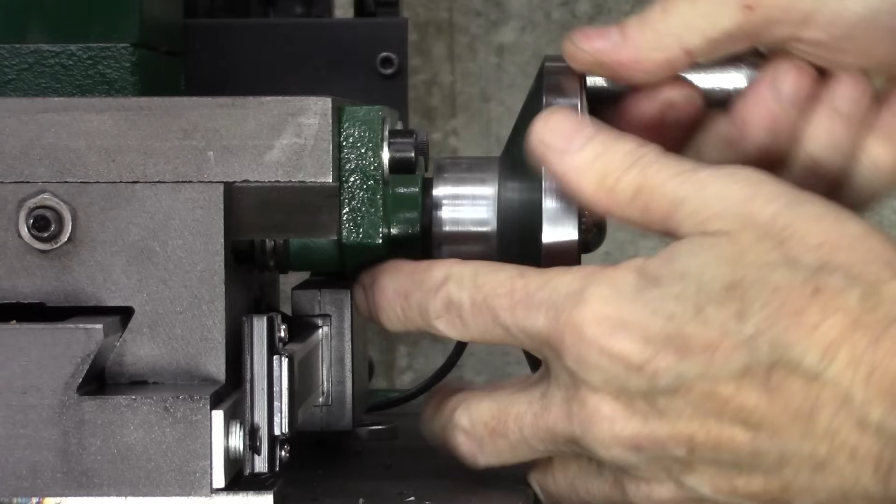What's stopping it is this thrust bearing right in here - you can see it right there, hitting the casting on this section. I don't like these lead screws anyway, they're 4 millimeters per turn. So we're going to replace this section with a different lead screw and let it pass right there. I think it'll work good.

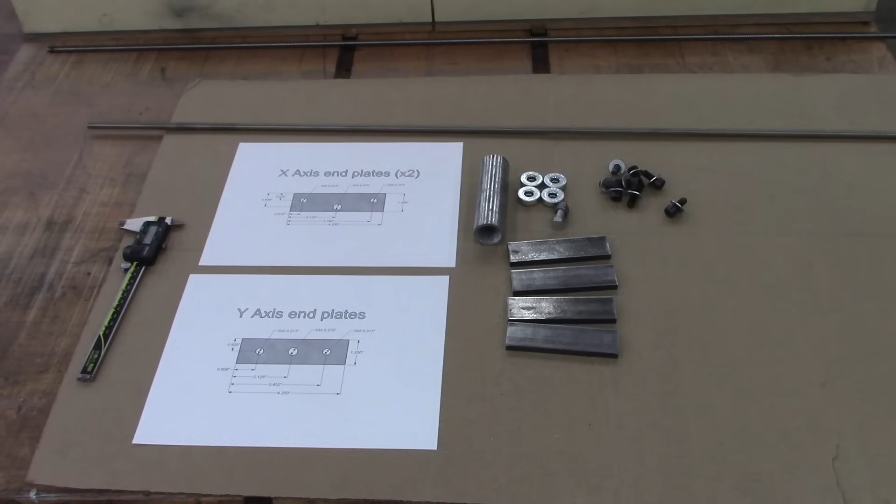Here's everything we need for this project. This is 1 and 1/4 inch stock - I think it's 5/16, but could be 1/4 or 3/8. It's a piece of 1-inch pipe, and I ground the galvanized off it because we're going to weld on that.

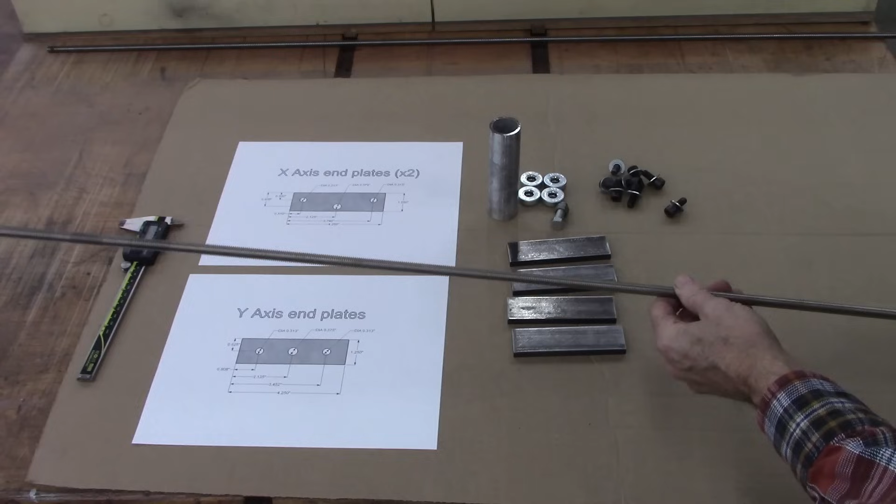I've got a piece of all thread here - stainless steel, and the reason it's stainless is because generally speaking stainless steel all thread is much better quality. That's going to be our lead screw, and these are thrust bearings - there's going to be one on each side.

Now that's going to slow down the travel of the table a lot. There are other options - this is a 3/8-10 Acme thread I got from McMaster-Carr, but the nuts that go with this are fairly high priced, and this is a little pricey too. I don't remember what I paid for it.

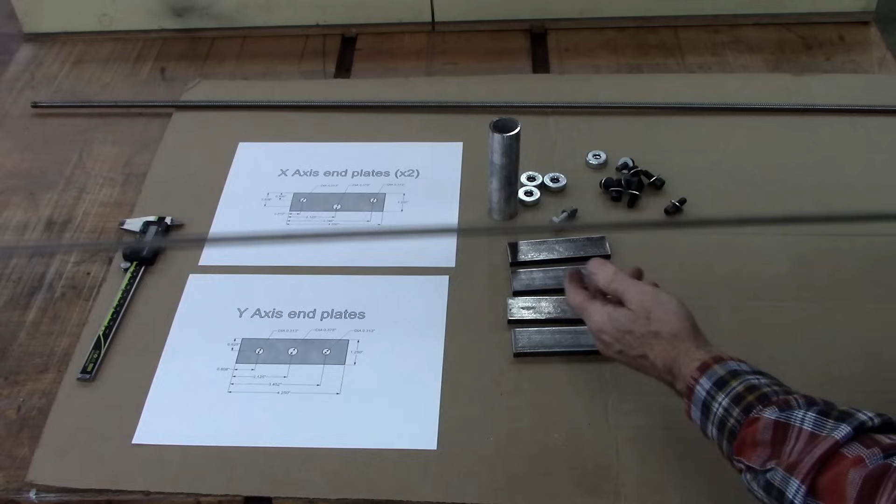But we're going to use this. One turn will be 1/16 of an inch, but I've got DROs on the table so it won't really matter. The 4 millimeter pitch currently on the table is a little aggravating because it's hard to hit the number on my DRO - it's very fast moving.

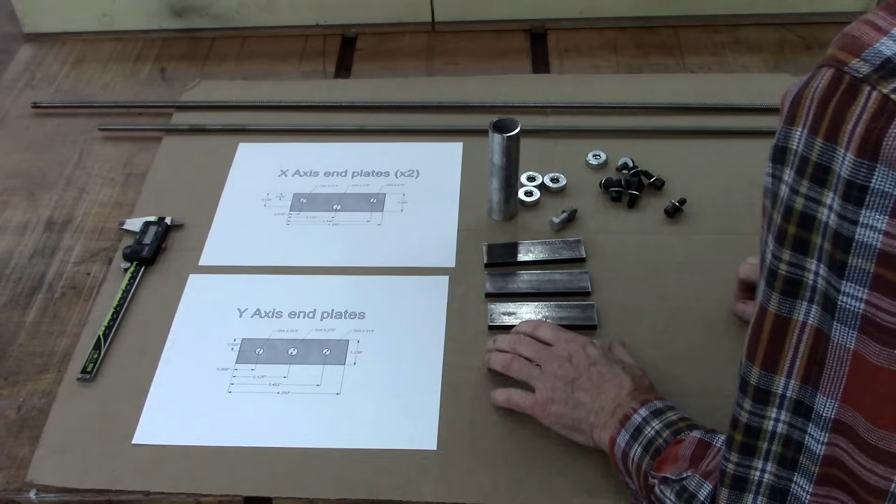So first thing we're going to do is make these plates - this one's for the Y-axis and this one's for the X-axis. We're going to use the XY table to drill these, and then take apart the XY table and install this.

Okay, I need to go in 5/10. 3.74.

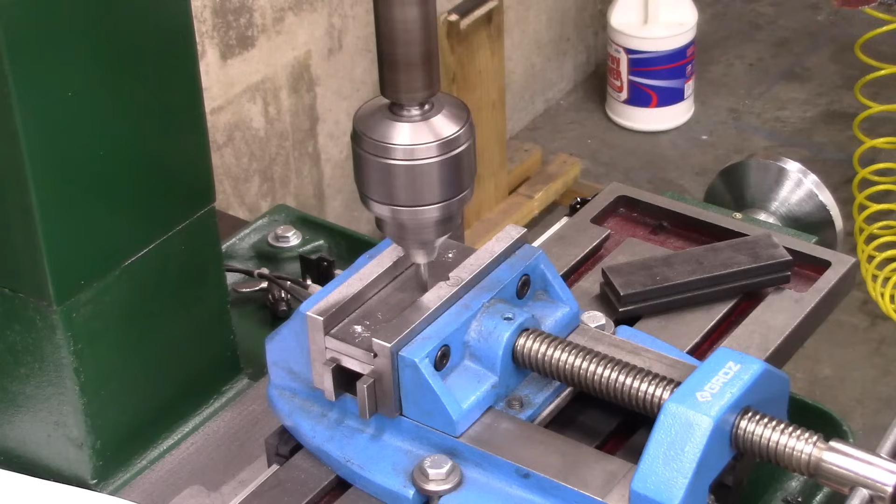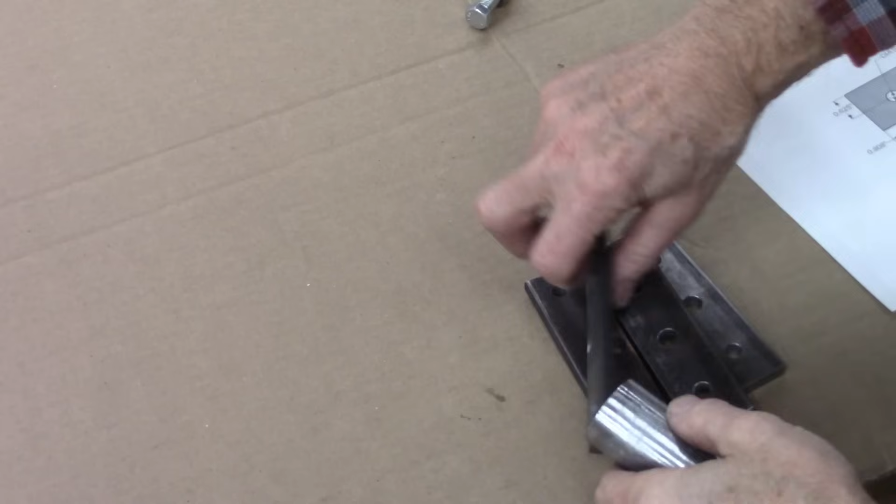Okay, the next thing we're going to do is cut little pieces of pipe off, just a little bit more shallow than that thrust bearing, and we're going to weld it there. That'll keep everything centered on this plate.

Okay, the inside diameter of this pipe is amazingly close to this thrust bearing, so we're just going to go inside. This is just regular water pipe - I'm going to open that up just a little bit.

If you don't have a lathe, you could probably do this by just cutting little rings off, but you'll have to take a die grinder or something to the inside of that.

Okay, I'm going to cut these off just a little bit shorter than these thrust bearings. We need four of these.

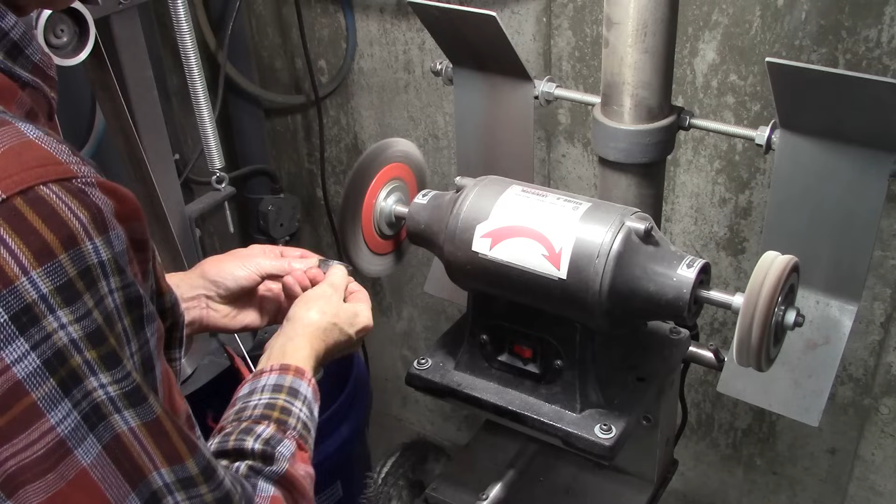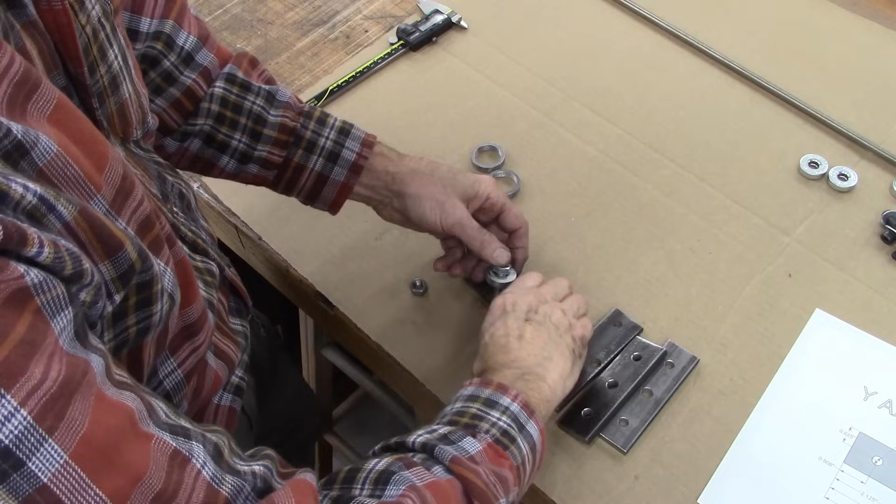Okay, my idea here is to bolt that on there, and weld that right there. I think it'll work good.

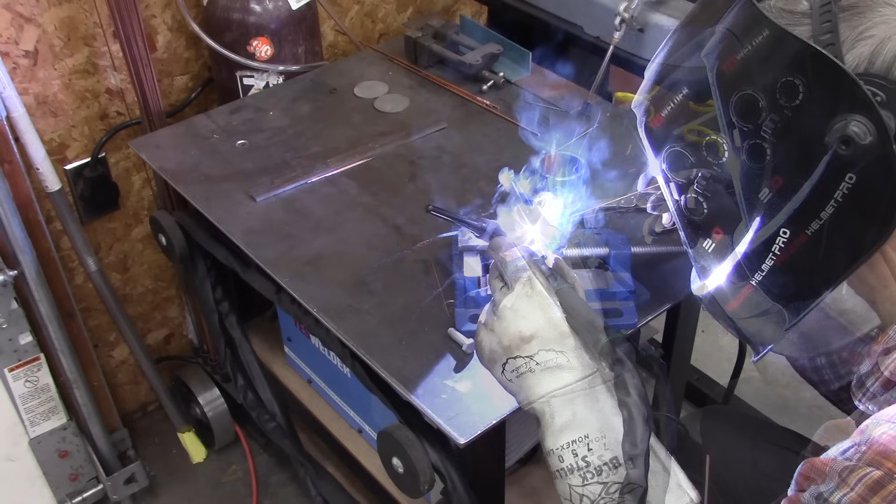Well, I thought I got most of the galvanized off of that, but there's still a lot of galvanized on there, and that's not good.

Okay, these thrust bearings are made in such a way that this side centers the shaft - in other words, this hole is smaller than this hole. So if you put it in this way, it's kind of a snug fit. I think those distorted a little bit, but they'll go in there. I just don't want to get them stuck in there yet - I want to paint these before I get them stuck.

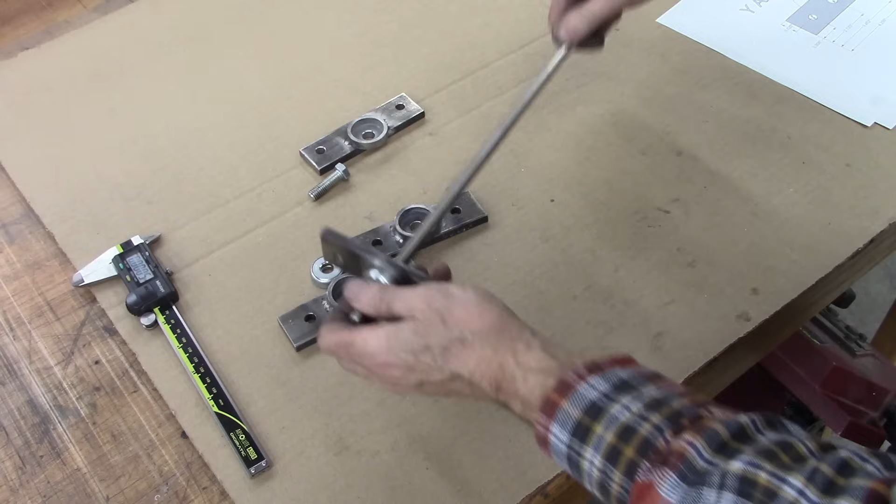The rod will go through there and we'll put a nut right there, and it'll be under tension, clearing the hole on the back side. So the threads are not a bearing surface. Okay, this is going to be bolted right there.

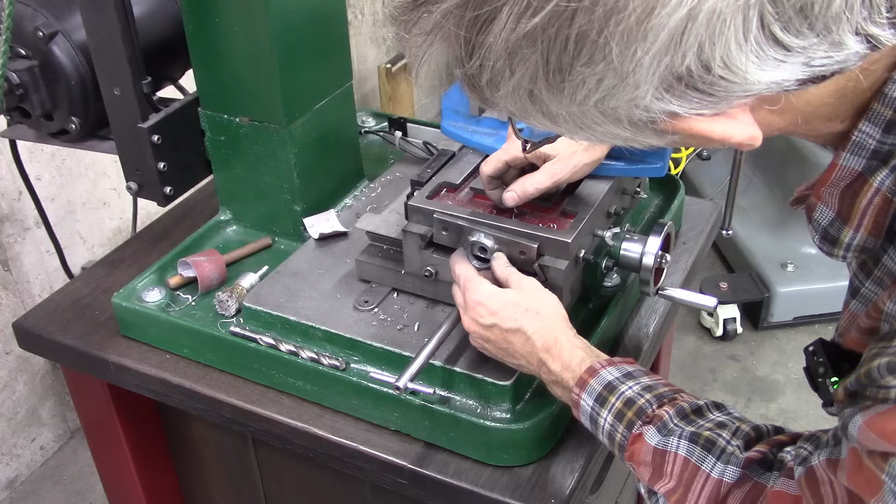But that's really close to hitting right here and here. I don't know if that's centered or not. Pretty close. But I'm going to grind that off right there on both of them. It could cut it off, but I'm going to grind it off.

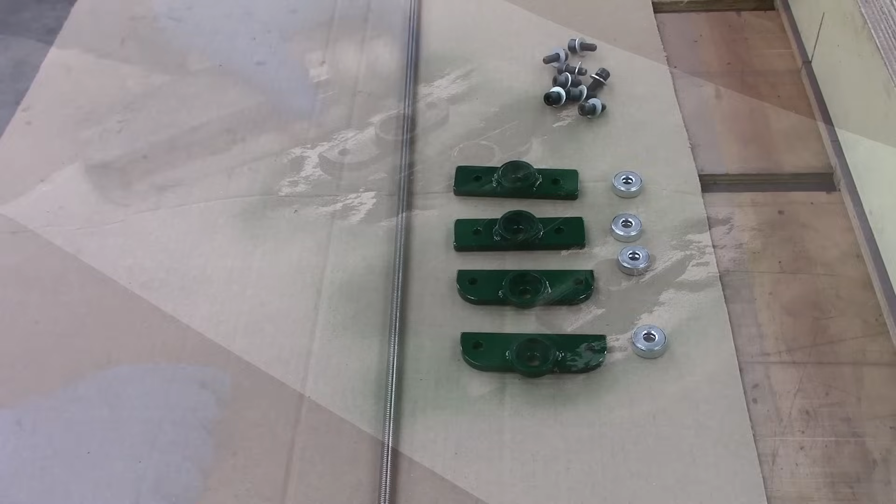Oh yeah, it gives me plenty of room. Okay, there's the bearing brackets for each end. I think it came out pretty good. I think it's going to work good. Now it's time to take this thing apart. Take the DROs off, take it off the drill press.

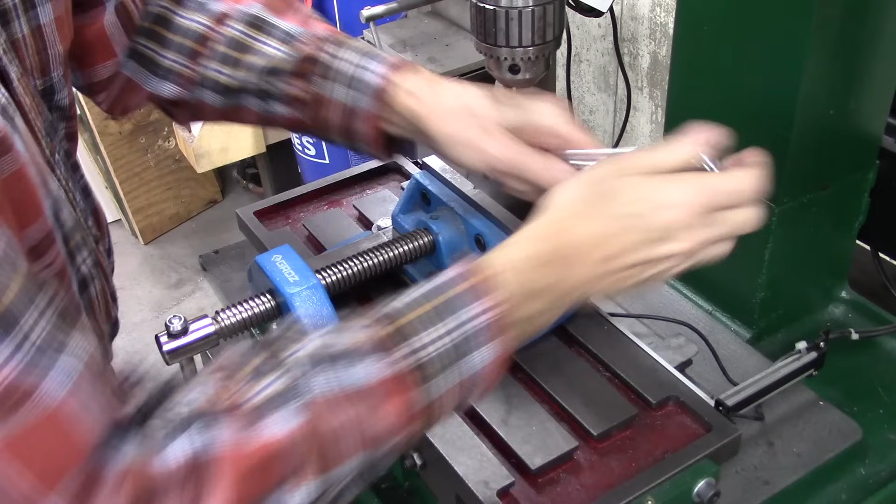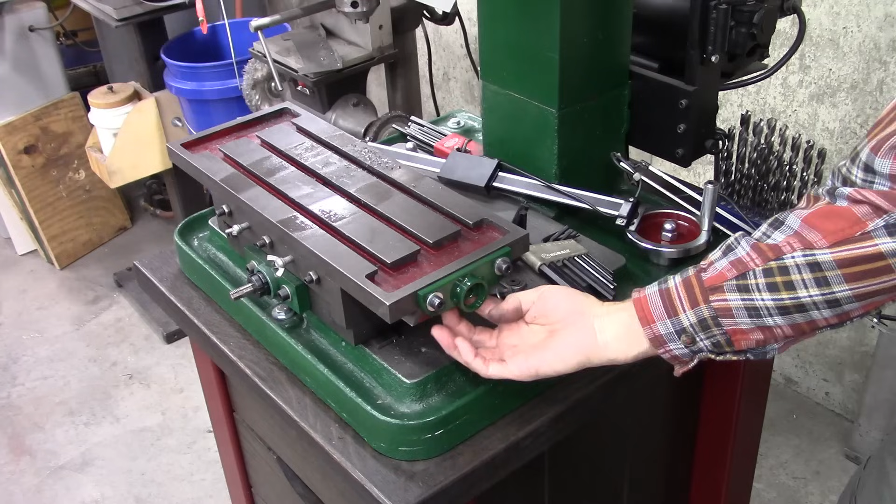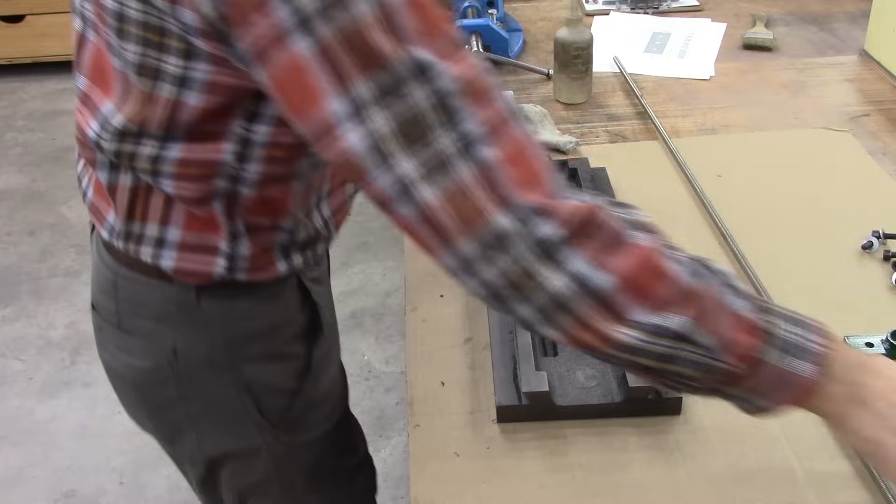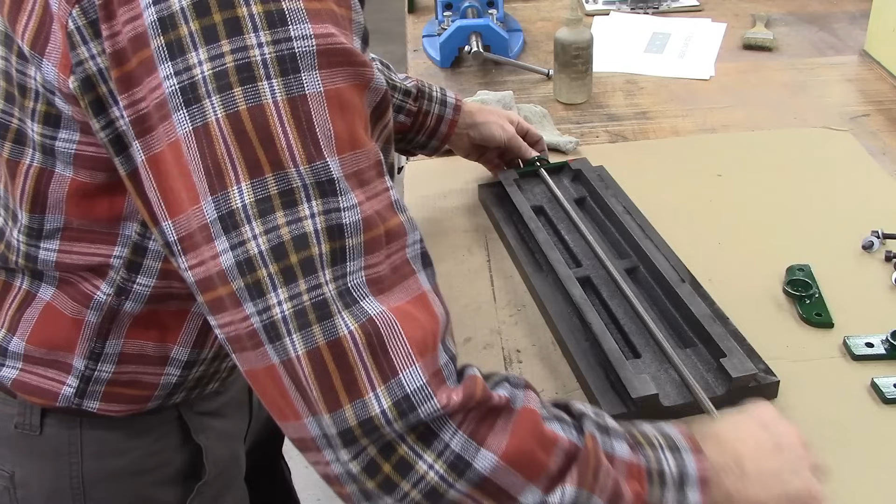Yeah, let's see if my brackets fit. I think that'll work. It's a little closer to the top of the table than I thought it would be. Yeah, let's take it apart and take a look at it. I may have to slot these holes to move that lead screw down a little bit. Really close to the table right there.

Okay, I drilled these brackets in pairs so I can mark it. I got this one bolted in on the original end of the slot where I drilled the holes, so I can measure over like this. Mark this one in the same spot and drill my holes. And then I'll continue with the tap size drill.

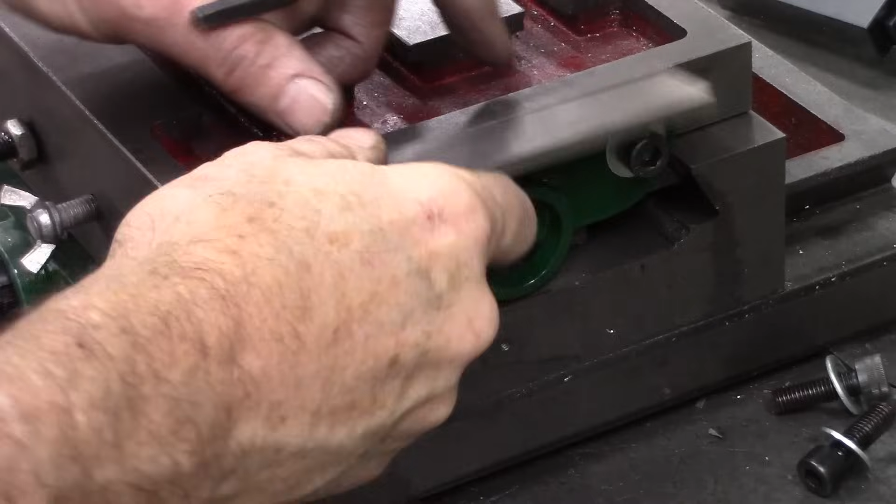Okay, this right here is a little tighter than I expected it to be, but I got it 1/4 inch down, and I'm about a 32nd of an inch from this lower piece right here. If I had to, I could grind part of that off, but I don't think I'm going to have to. So I'm going to mount this one on the other side. I took it back off to get the table on.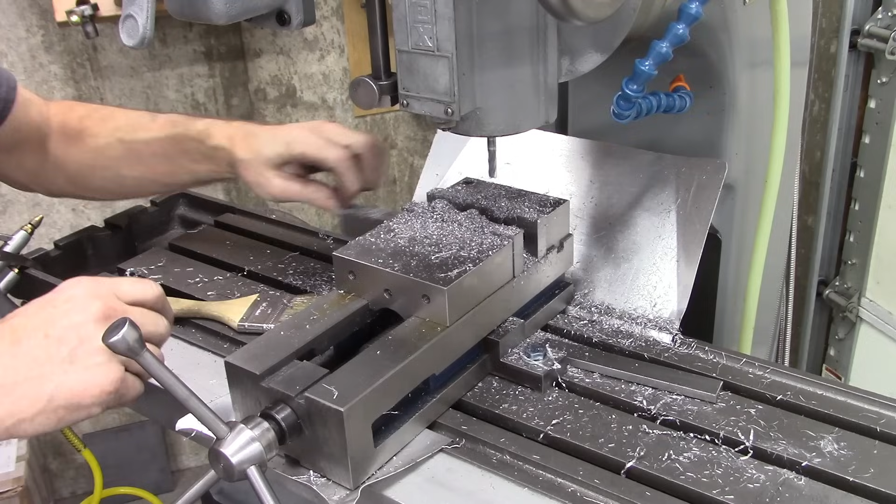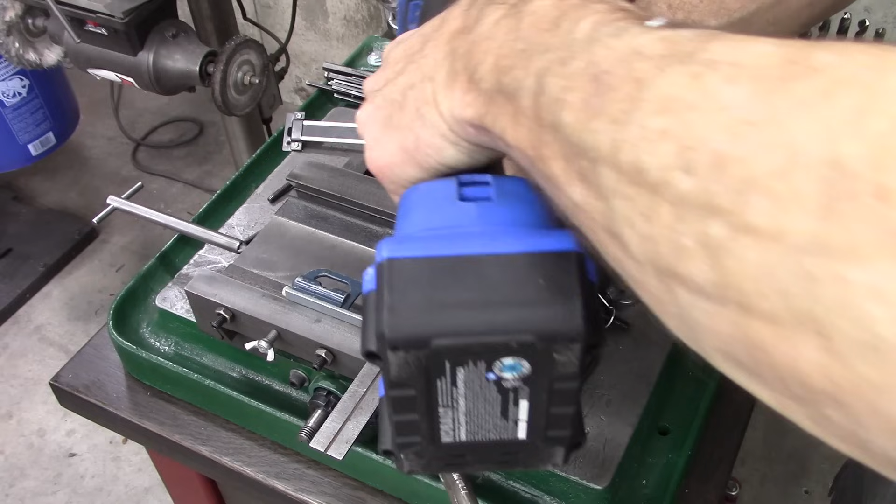Okay, the table is centered from the outside here, and the screw needs to be centered. So I've measured in 2 3/8 from each side. Fortunately, this is just a hair taller so that I can just sit here and hold it against the ruler and start my holes, hopefully, without moving.

Okay, I had to enlarge the holes very slightly in that to get it to be square, drilling by hand. That's why this XY table is so important, so you can, oh good. Oh, I think it's rubbing the top. Yep. May have to mill that casting on the bottom of the table just a little bit. Either that or mill the top of that off. Guess I'll mill the top of that off. Or the bottom. Bottom would be better.

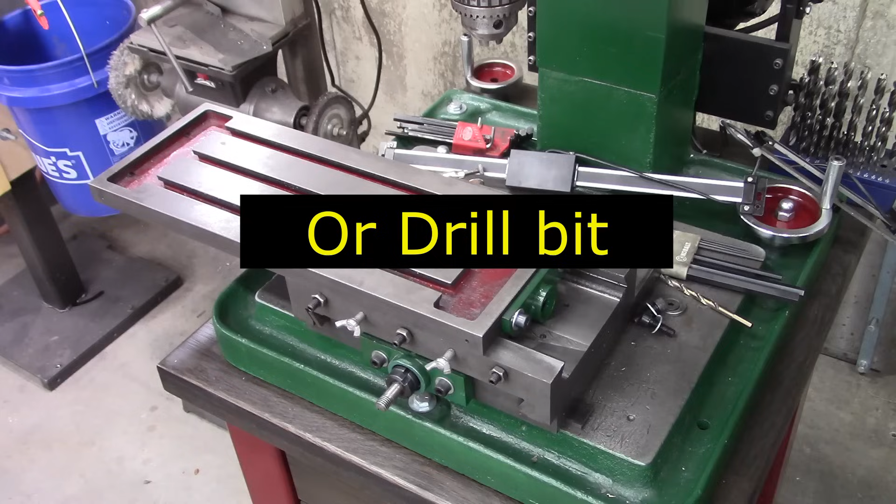Oh, heck yeah. Now I can take a transfer punch and mark that. Okay, I need to drill that out to 5/16, which is a 3/8-16 drill size.

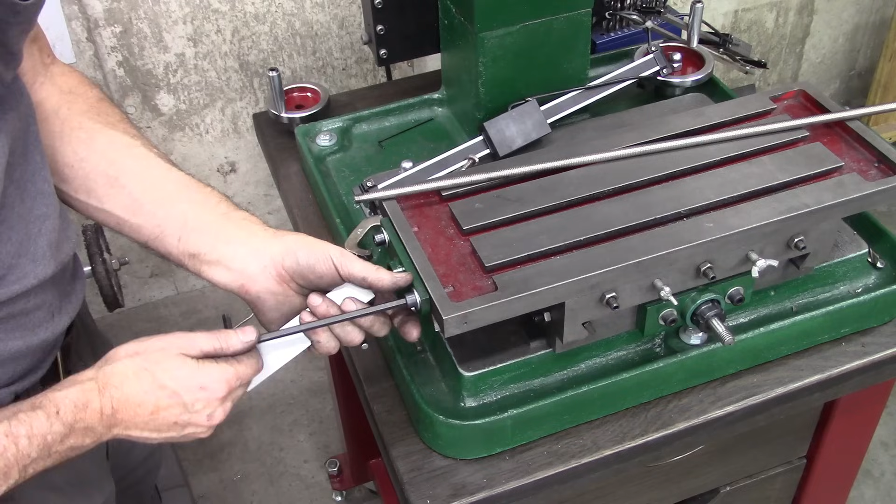I got a nylock nut on this end. Now I haven't got any lubrication on it. Obviously haven't got the table secured. Oh, that's a lot of travel.

Take this all the way in, right there, and make the handle out here where it doesn't interfere with the DROs or the table. Well, that hand wheel is overkill. Don't need that kind of leverage. Let's see what we can come up with.

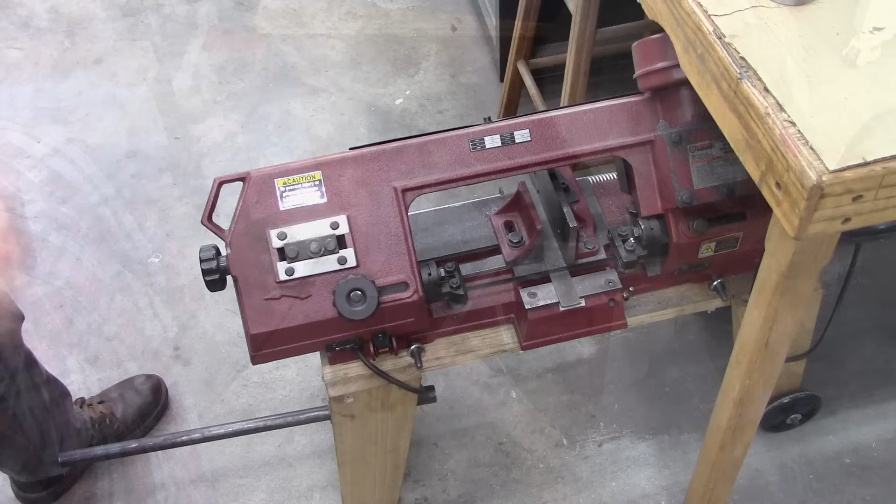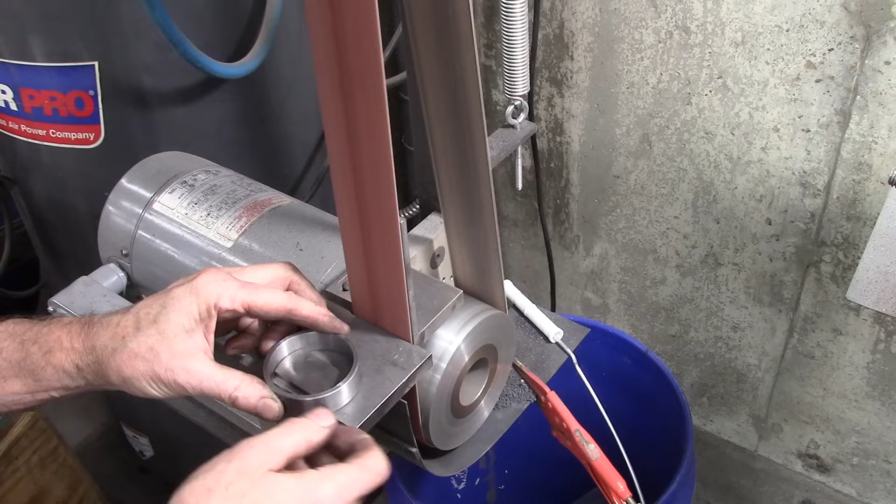Oh, that's it. I don't know what I was making out of those. There's a piece of pipe I cut off. That'll work. Okay, I got a piece of copper tubing, just a spacer on there.

Okay, let's move on to the lower lead screw. This is the lower lead screw nut. And it's going to be the most challenging thing about making, I'm going to have to put that on the bottom. Definitely going to be challenging.

I think those screws are sticking through. Yep. I'll have to fix that. I might change the design on this a little bit. Just forget about the bracket on the back. We'll see. Yeah, that fit good.

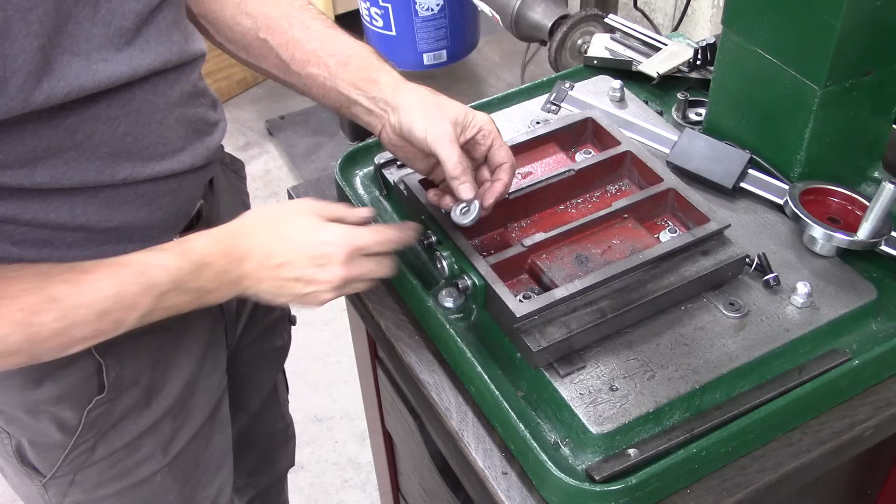If I put these back to back, there's a hole back here. Let me show you. There's a hole back here that lines up perfect. I can just put those back to back to keep the backlash out. Yeah, I think I like that idea.

Looks like 3/4 inch. 3/4 inch from where that mounts to this right here. The bottom, so it's 3/4 inch from here to the bottom of this. So that's what I got to do for my nut. Kind of confusing. Okay, it's 822 thousandths from here to the center of that lead screw.

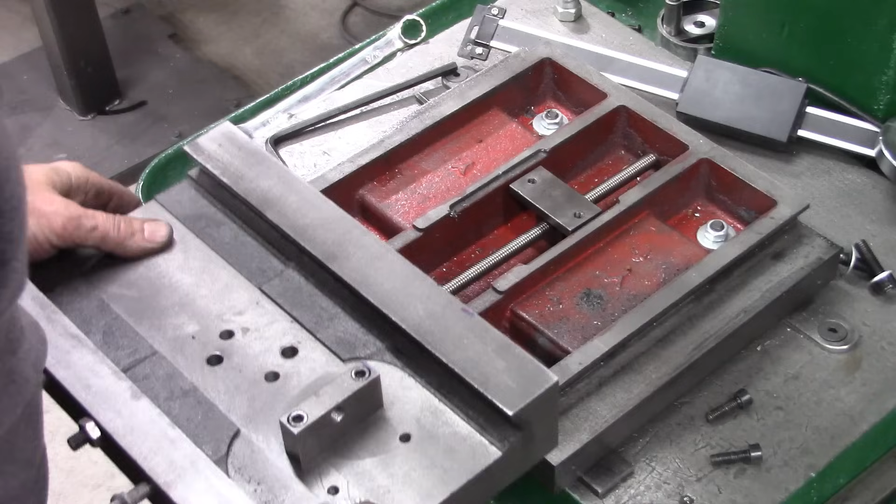Well, something's off center. And I went by, actually I measured the center. Something's off. Tell you what I'm going to do. I'm going to open up the holes in this bracket, so I got some adjustment there.

Okay, I figured out something. Something about stainless steel and mild steel, which is what I made my lead screw nuts with, are not compatible. I'd run this in and out one time and it would start binding. And then I'd run a tap through the nut and it would be okay for one complete travel and it'd start binding again.

So I'm going to change this lead screw while I got it apart and eliminate this problem, I hope. I don't know why steel would be incompatible with stainless steel. If anybody knows the reason, leave it in the comments. I've never seen it before. Oop, wrong way.

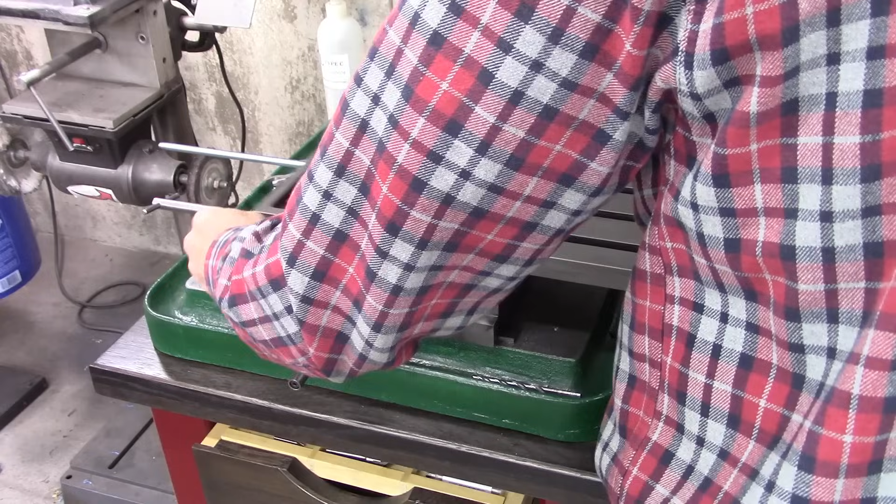I do believe that zinc plated, maybe the zinc plating has something to do with it, but steel on steel is better than stainless steel on steel. These are much smoother lead screws. Okay, the steel lead screws are definitely better. Okay, let's replace these hand wheels.

The steel threaded rod definitely works better than the stainless steel, but this one's still a problem. If you turn it, it works fine, but if you turn it with a hand crank where you're putting sideways pressure, apparently that lead screw in there is flexing in the nut. For some reason though, it's worse at this extreme when the nut's closest to the pivot point there. And I can't figure that out. But I think a larger hand wheel will resolve the problem.

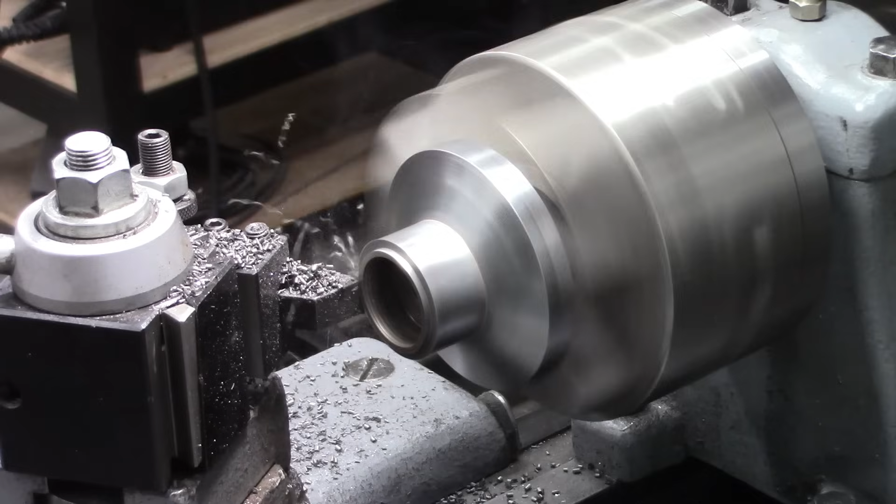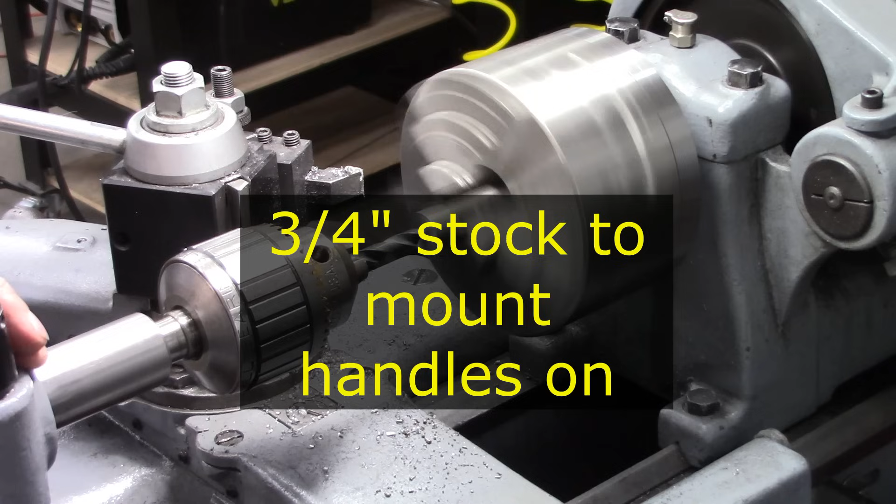Okay, first thing I'm going to do is get rid of this recess right there on the dials. Cast iron. Soft but messy. Wow! Nailed it. Honestly thought that would be a hair oversized, but that's good.

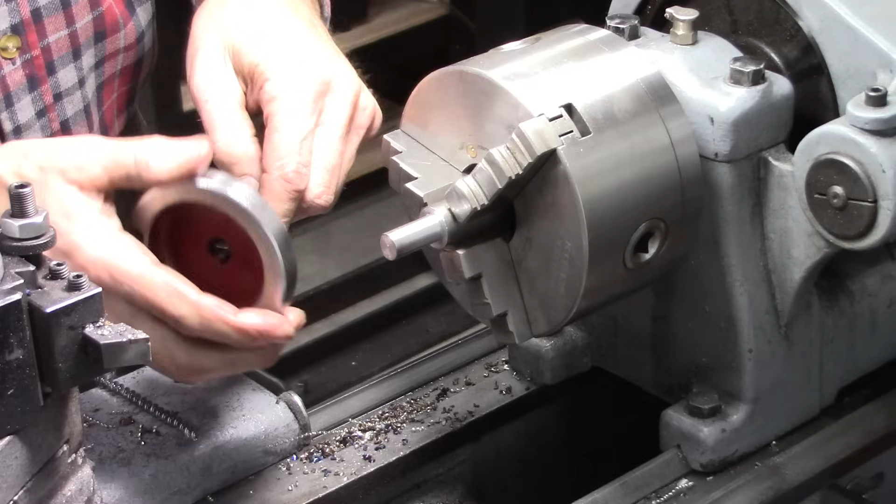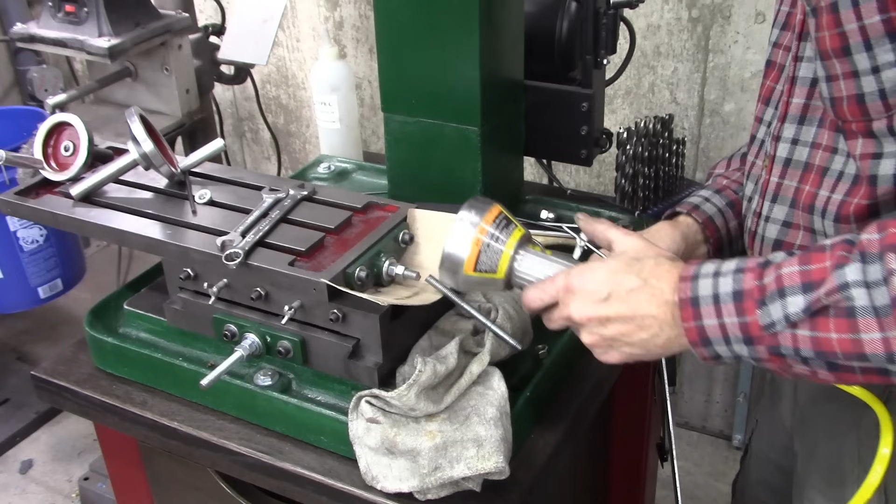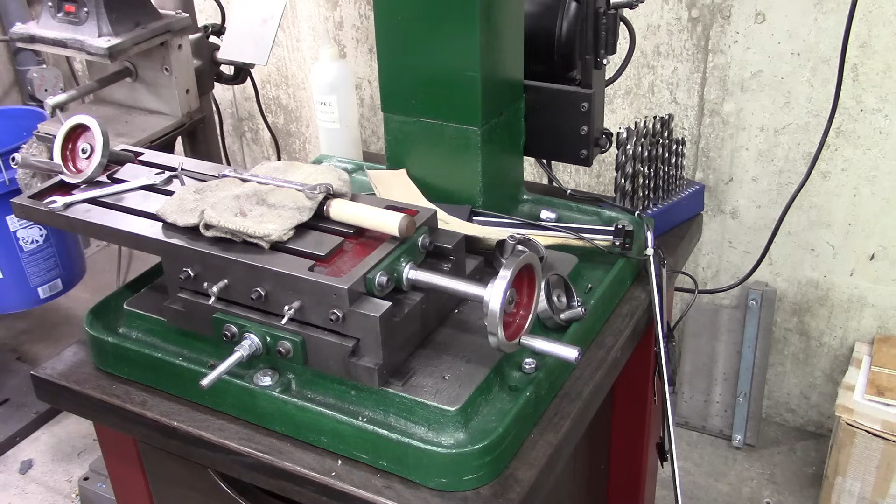Well, I was going to thread the end of that and put a nut right there, but I think I'm going to put a screw in there. So I need to make it slightly shorter than the depth of that. I like that. It works good. Wobbles a little bit, not bad. Okay, next one. Okay, I need several spacers, 180 thousandths.

Well, there's one DRO attached. Forgot how I had it mounted there. I got the table mounted backwards. The holes for the DRO are on this side. Here, let me swap that around and then we'll continue.

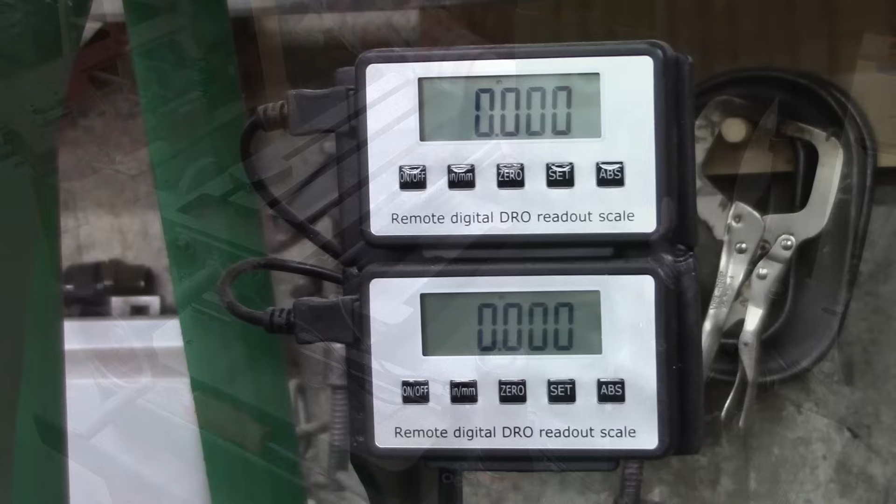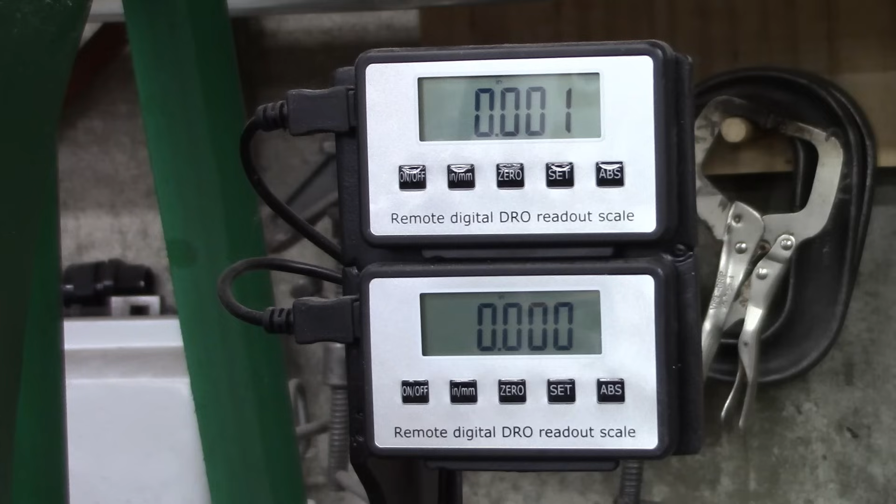Okay, I know you can't see the handles, but that's almost no backlash. That's the amount of backlash. That's way better. Try the other axis. It's even a little better. Very cool.

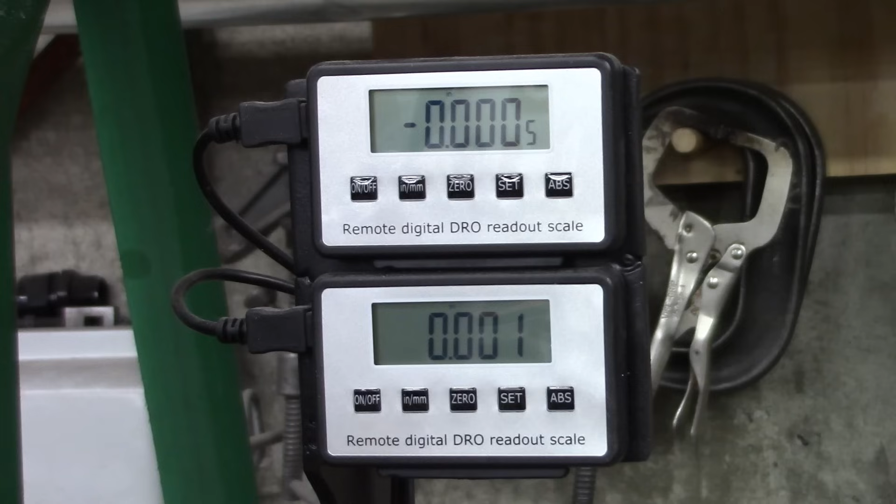Well, that about wraps it up. I'm very pleased with it. For a while there I thought, boy, this is not going to work out too good, but it's working great. Now, redoing this handle was what it needed, and the steel lead screws, the steel versus stainless steel. Stainless steel just did not work. In fact, when I ran the table through and back with the hand drill, when I went to put the table back in, it locked up. It galled the threads in there. This works perfect now.

Wonder what the deal is with stainless steel. If anybody has any idea why it's doing that, let me know in the comments. It's much easier to deal with now. It's a little slow if you got to make a big move, but if you got to make like a ½ inch move or something, it's ideal.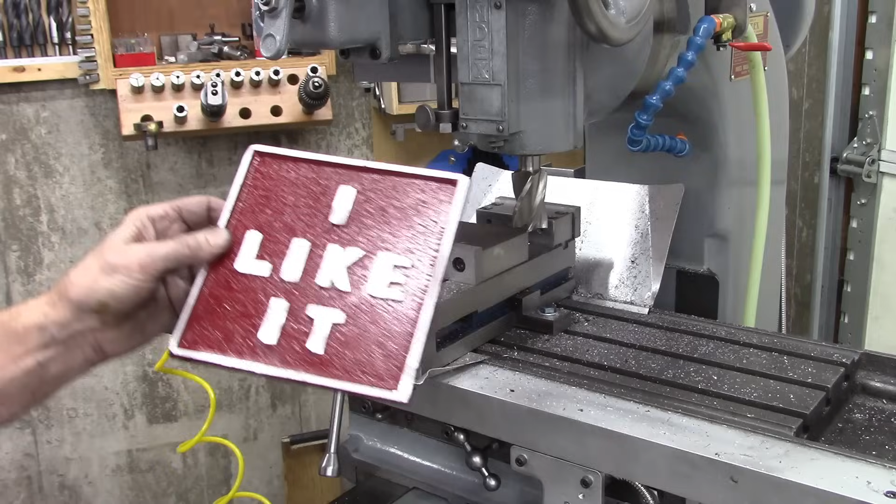And thank you, Gary, from Bowling Green, Kentucky, for the I like it sign. That's pretty cool. I like it. One of my viewers made that for me, cast it out of aluminum. I painted it and then milled off the surface. Kind of looks rough in there, but overall I like it. What do you think? I like it.